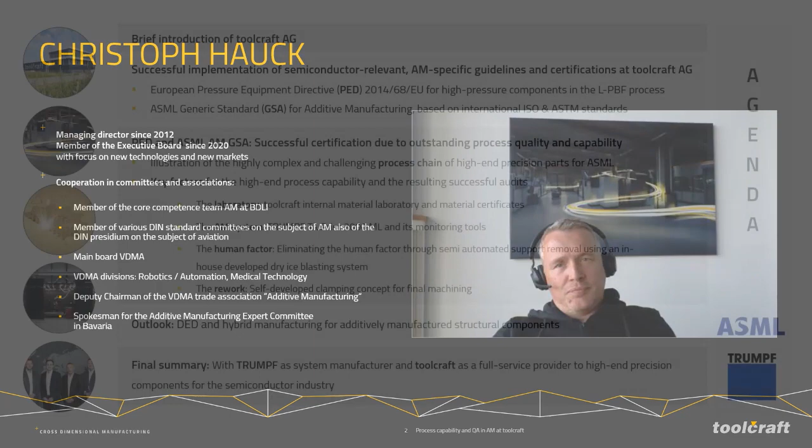This is the agenda for today.

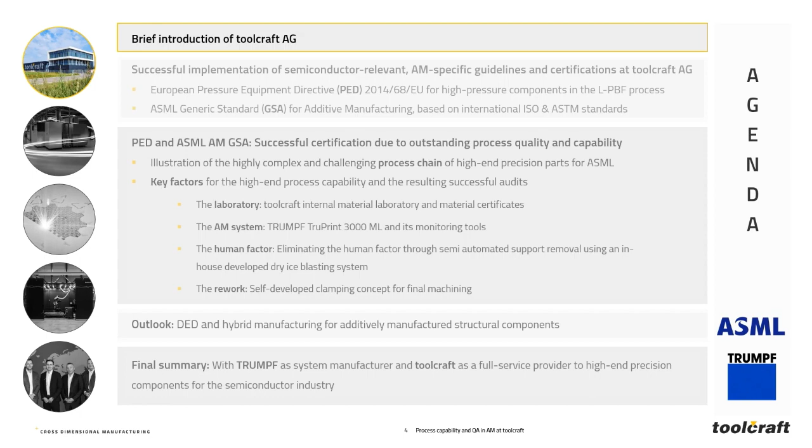First of all, a brief introduction of Toolcraft AG. Toolcraft AG is located in the middle of Bavaria, in a region called Central Franconia. At the moment we have around 463 employees, including 59 trainees. We have 3 board members, 2 facilities, and our molding shop is 12 kilometers away. We have 8 certificates, and our year of foundation was 1989. We are in continuous growth, averaging around 14% per year over the past years.

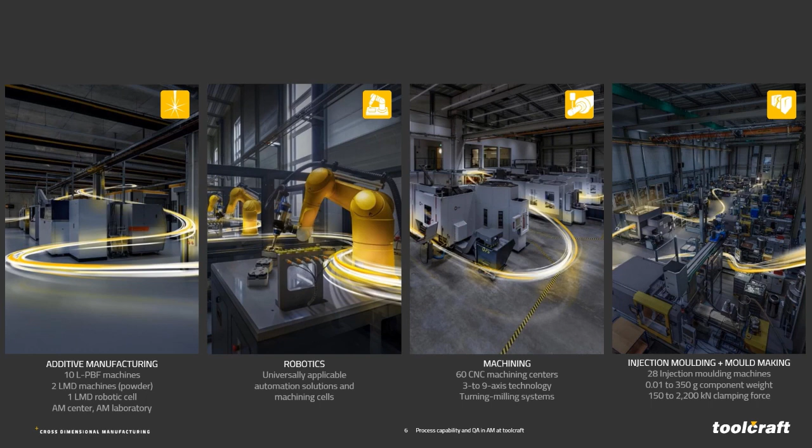The technologies that we provide are additive manufacturing - laser powder bed fusion and laser metal deposition - robotics, high precision CNC machining, and injection molding and mold making.

We have certifications in the aerospace sector, called EN 9100, and the medical sector with ISO 13485. Toolcraft is approved according to the Nadcap Association in welding, which covers additive manufacturing since 2017, but also in non-destructive testing. Finally, we have a DVS certification for additive manufacturing in the defense sector, and also the European pressure regulation.

And now a video about our additive manufacturing journey.

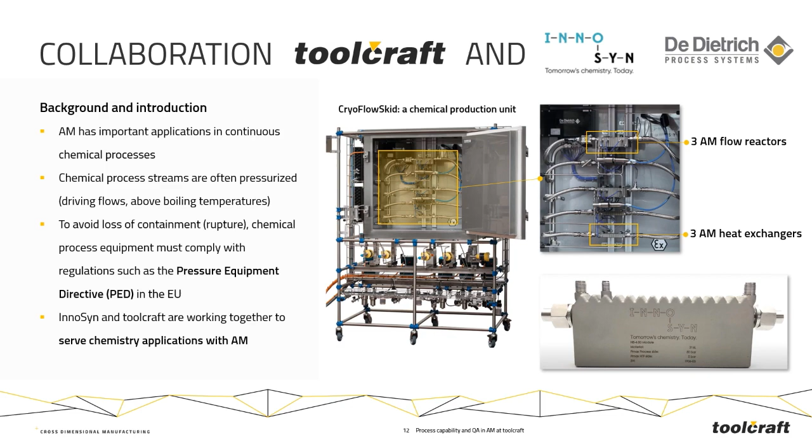The PED provides mandatory guidance for the design, the manufacturing process, and the conformity assessment of pressure equipment with a maximum allowable pressure above 0.5 bar up to several hundred bars. All the equipment has to pass rigorous tests, and only if the products are considered compliant can they obtain approval according to PED certification. Finally, every certified component receives a CE mark.

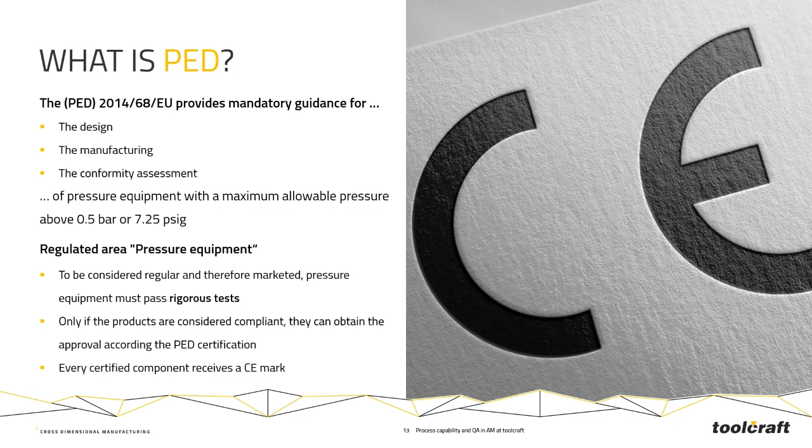Our PED audit was in 2022, in cooperation with TÜV Rheinland, covering comprehensive requirements for the quality management system, the design, the AM process capability, laboratory tests, material properties, personnel, and quality assurance.

Challenges: it's a relatively new area of application, so we needed to define an adequate scope of testing and build up some statistics. Finally, we created a material specification for Hastelloy C22 made with additive manufacturing technologies, and a Certificate of Conformity (COC) that confirms all accompanying samples meet the values of the material spec. A COC must be issued for each component in accordance with the PED.

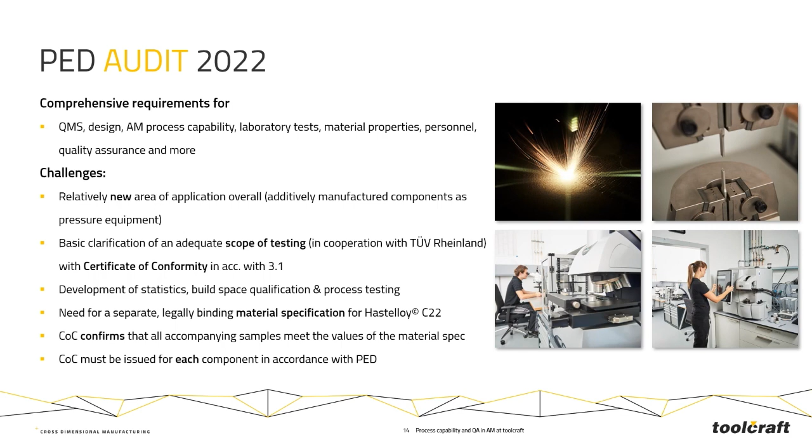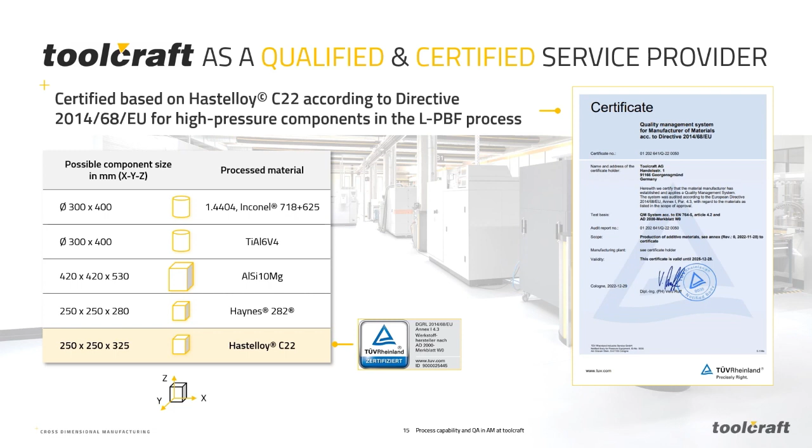As I mentioned, the material behind the certification is Hastelloy C22, a nickel-based alloy. We use it on one of our 10 LPBF machines. And finally, on the right side, you can see the actual certification.

Now, some information about the ASML generic standard for additive manufacturing, called GSA.

International and robust ISO and ASTM standards are the framework for the ASML GSA, and Toolcraft is also working with the German DIN and the European CEN on those robust standards.

ASML has 3 complexity levels in their parts, and since December 2023, Toolcraft is the first company worldwide that fulfills all these requirements.

The next chapter is the PED and ASML AM GSA successful certification due to outstanding process quality and capability.

On the following slides, I want to give you an insight into our high-end components additively manufactured by Toolcraft for ASML with one of our Trumpf systems and together with our partners Dockweiler and LRP secure systems.

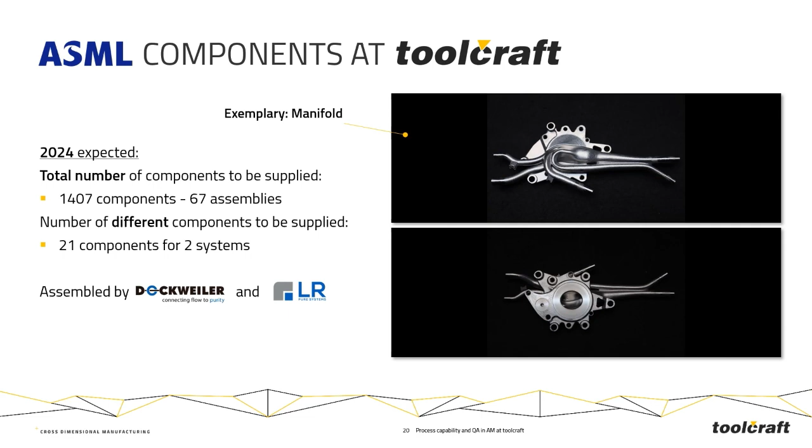This is an example of a manifold of a complex system that we supply to our partners, so in total 21 different components for 2 systems. With the expected ramp up this year for 67 assemblies, that's 1,407 components in total.

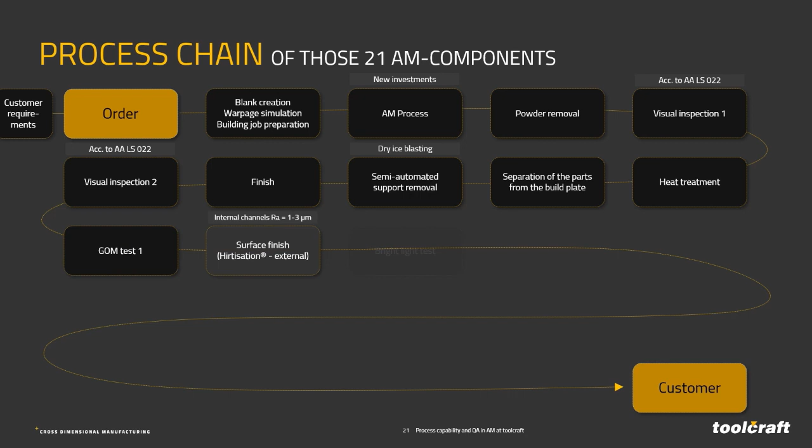From the order until the shipment to the customer, we have 23 different process steps in terms of production, but also quality assurance. So it's not just the printing of the part and then the shipment the next day. It's much more.

What are the key factors for the high-end process capability and the resulting successful audits? First of all, the customer requirements.

Possible customer requirements can be certification of the service provider, compliance with AM norms and standards, of course technical drawing and a 3D model, but also AM-specific customer specification.

In our opinion, high-performance additive manufacturing in metal without an in-house laboratory is not possible, because you have to check the powder, you have to check the process, and finally, of course, you have to check your component.

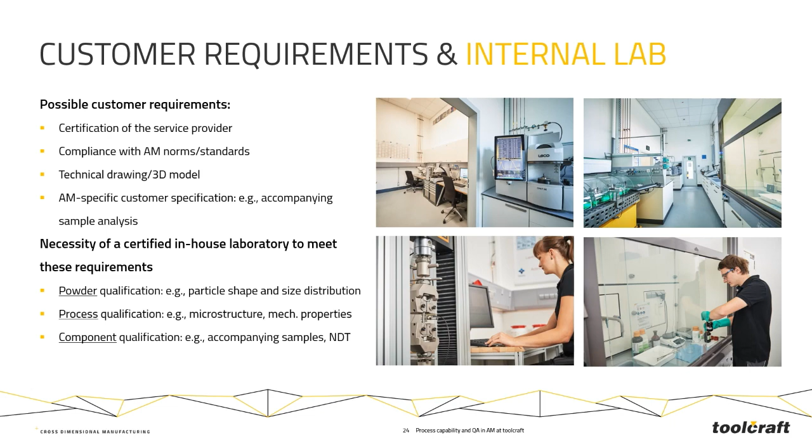Now about the AM process and our new investments.

To get or to reach the next level of industrial additive manufacturing, we had to invest in a brand new system provided by Trumpf. It's the TruPrint 3000 multi-laser. We installed the system in January 2024.

The processed material is the stainless steel 1.4404, which is also well known as 316L. We have 2 700-watt laser units installed.

What we like is the further development in the shielding gas concept, the primary and secondary gas flow, but also the extensive industrial monitoring for quality assurance. We need to have this, and it has to be robust, to reduce or finally avoid CT scan costs.

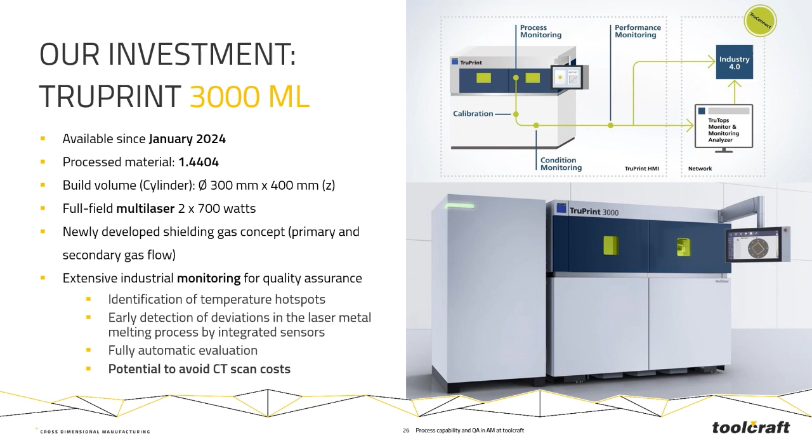The next step is our semi-automated support removal. This is our engineering solution of the support structure removal. It's done with frozen CO2, so dry ice.

At the moment, we are able to remove the support structure from aluminum, titanium, and stainless steel. Inconel is in final development, and we have some materials already in mind we want to progress on.

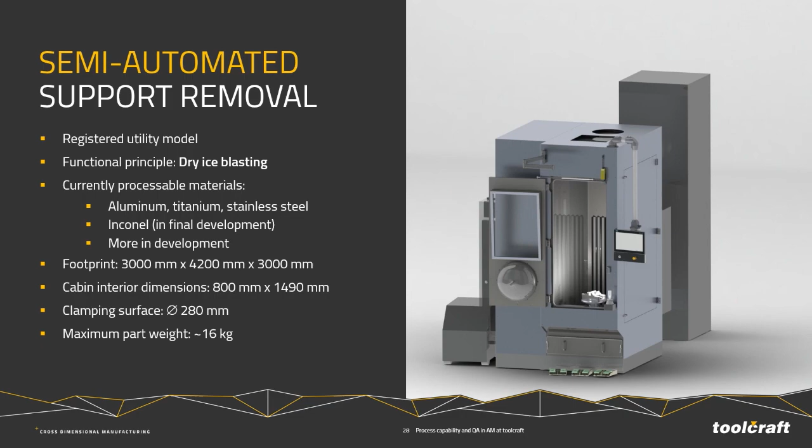A little bit of insight into the registration of the utility models. So you see a specific nozzle geometry, but also specific surface structure inside the nozzle, and also an automation level.

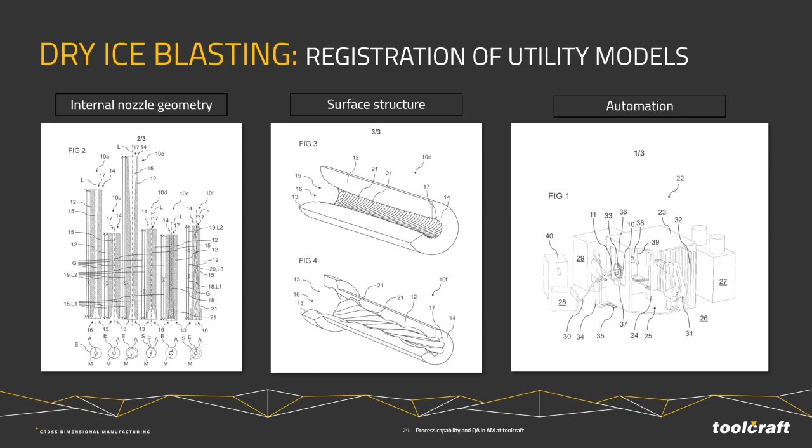Again, a short video in the middle showing how the support structure removal is done with the frozen CO2.

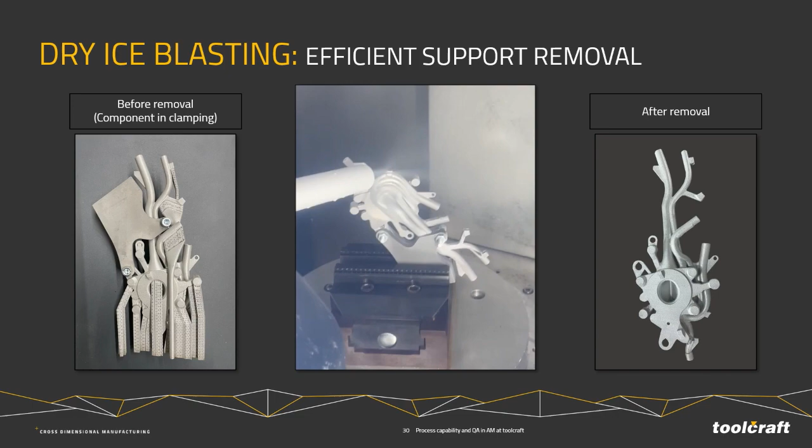Okay, the next process step is the machining. And also for these really crazy additively manufactured designs, you need to have specific clamping devices.

And this is the clamping concept for the part we already have seen. So it's based on our knowledge and innovation.

We use Siemens NX in terms of the CAD system. Meanwhile, we have the parts standardized in a catalog and included in an NX library, so we are quite fast with these standardized parts to create different kinds of clamping concepts or clamping situations.

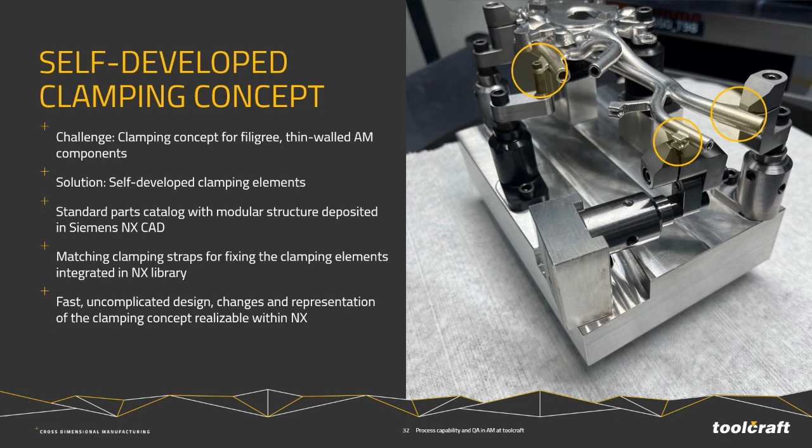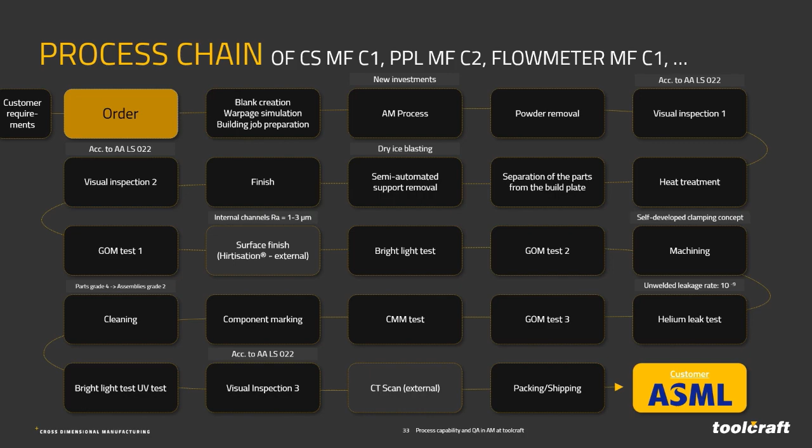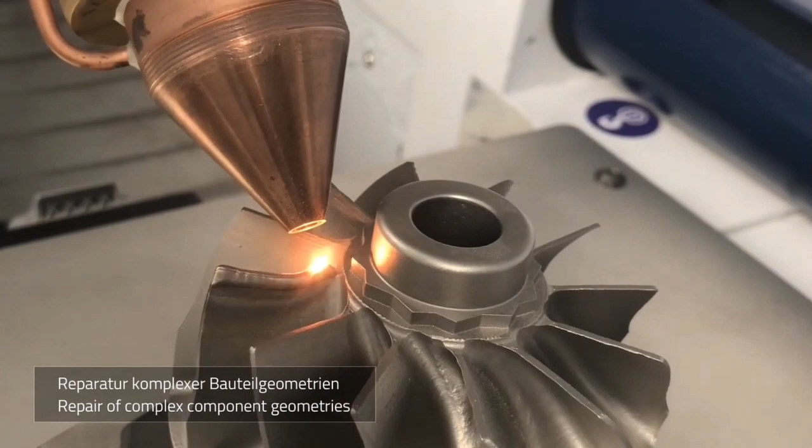Toolcraft is a competence partner in LMD technologies to one of the biggest consumer good producers in the world. Here's an example of a repair application in terms of mass production machinery.

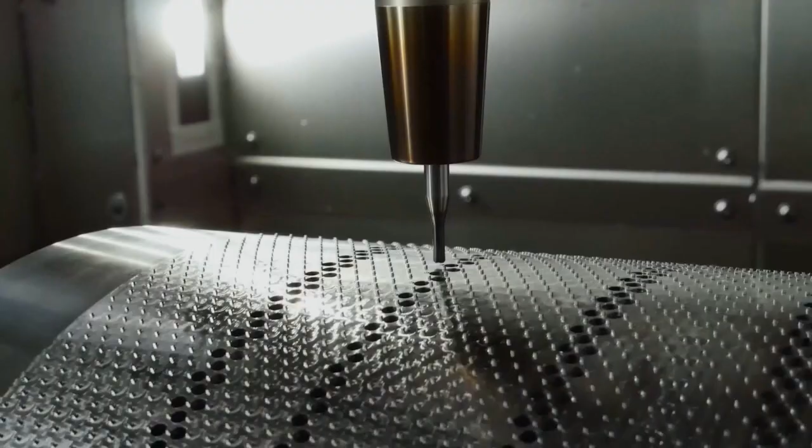A security project, LPBF and LMD. For complex housing, it was necessary to produce 4 single parts in the powder bed, and then we joined those parts together with LMD technology.

The standard nozzle was not sufficient enough to reach all the areas of the part, but no problem, as we are also able to produce pure copper and copper alloys. A slim nozzle was produced by Toolcraft.

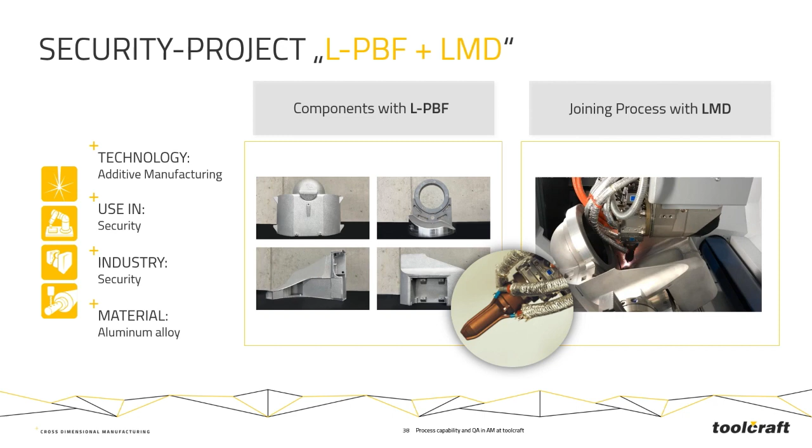And finally, the system is installed at the Puma tank from Rheinmetall, which is our end customer. This is just to give you an impression. It was necessary to do it with additive manufacturing for the functional cable feeds, for the high long-term availability of spare parts, and the high speed in the development of the carrier element.

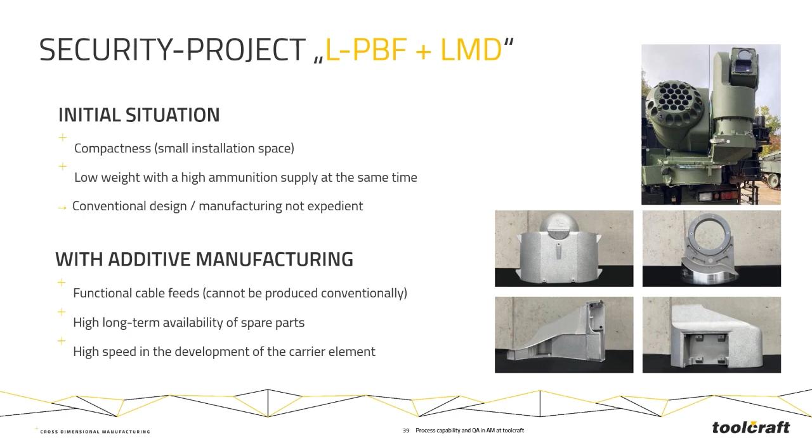Let's have a look at the joining process, which now takes around 2 hours for this multi-layer joining process. In the past, it was a manual process, more than 10 hours.

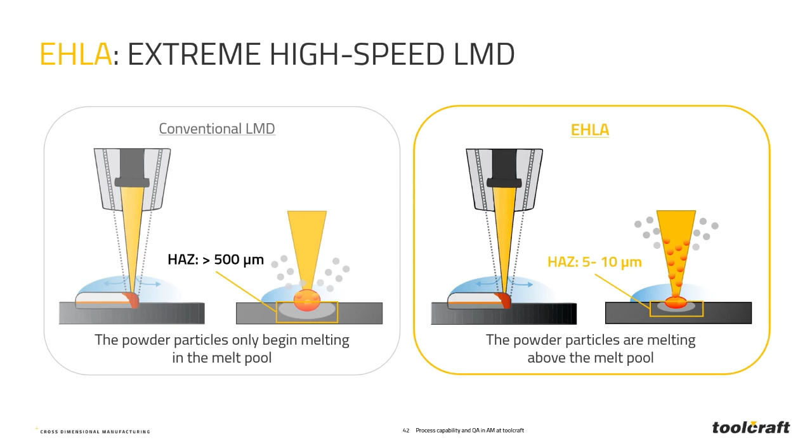And then we end in the extreme high-speed LMD here at Toolcraft. On the left side, the conventional LMD process with a heat affected zone of around 500 micrometers, compared on the right side, the extreme high-speed LMD with a heat affected zone much lower, 5 to 10 microns, because powder particles are melted above the melt pool. A real-time comparison of the process speeds, left side LMD and the right side the EHLA process for high-speed LMD.

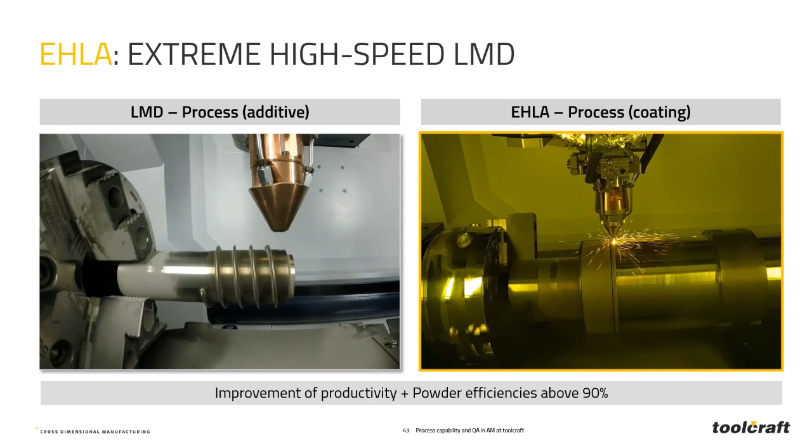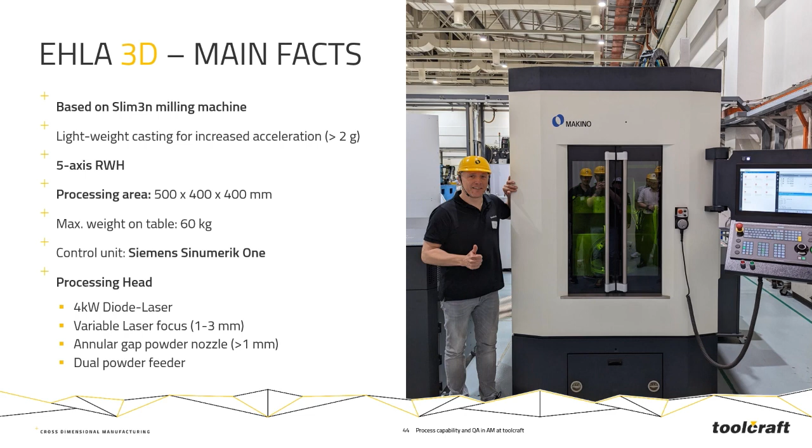Last but not least, our self-developed robot cell for hybrid additive manufacturing. This project is the marriage of our additive manufacturing division together with our robotic engineering team. The robot we installed is from our partner Mabi Robotic AG in Switzerland, and it consists of an adaptive spindle module. The spindle fixture is an HSK 63. The spindle speed is 16,000 rounds per minute, and at the moment the number of tools is 7.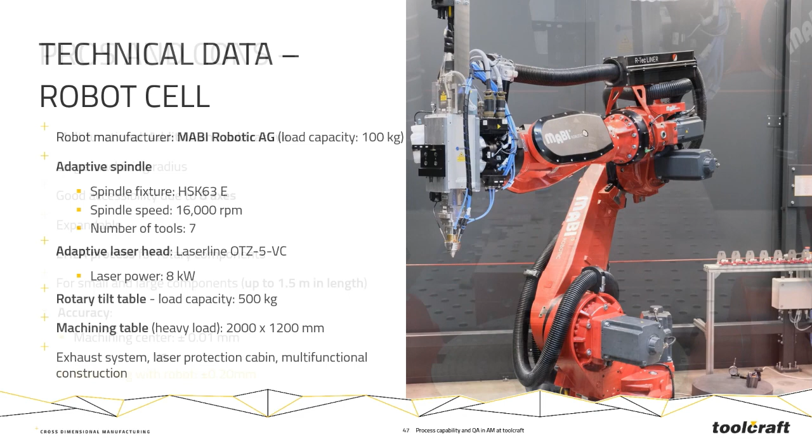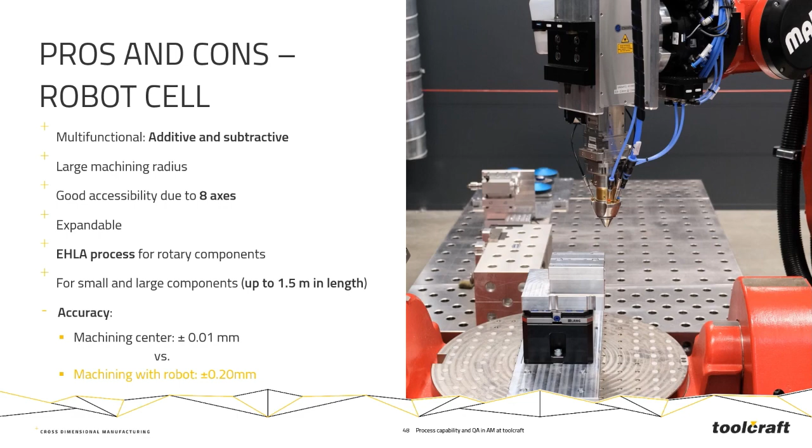Also a short video of the capability of the system.

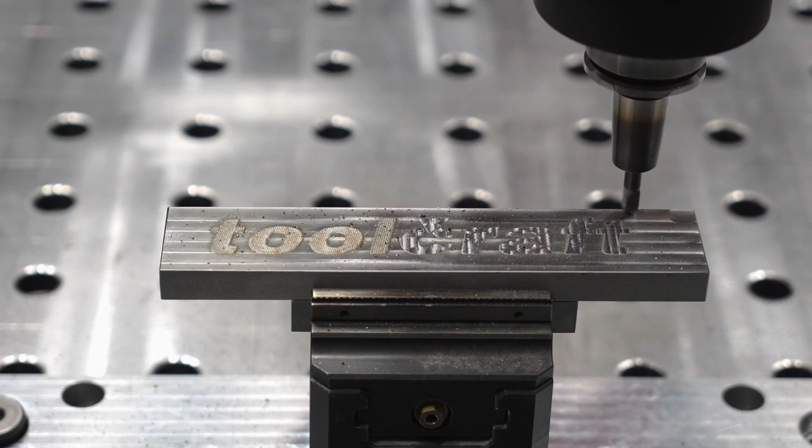What's next here at Toolcraft? Hopefully higher deposition rates through wire application. Here's an outlook.

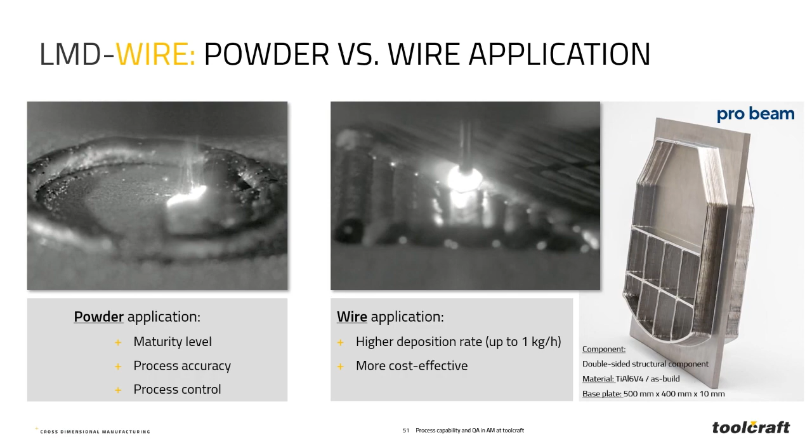ProBeam offers a nice solution based on electron beam technology. And here we can see a nice example on titanium grade 5, how to reduce chips and think differently in the production of structure parts or frames.

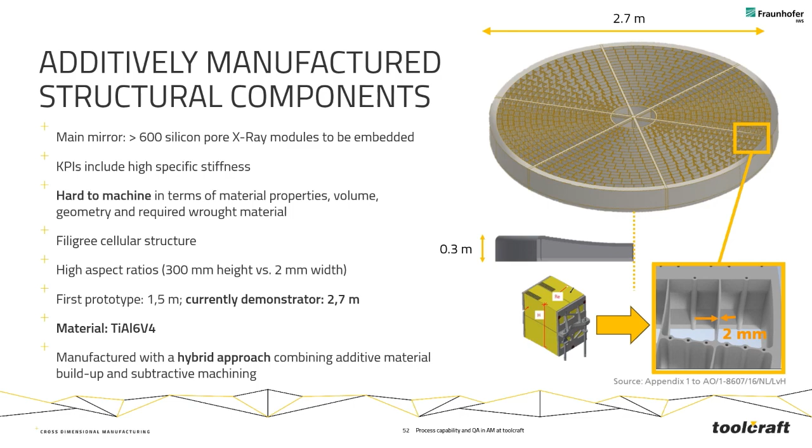Fraunhofer is a long-term R&D partner of Toolcraft, and here's an example from Fraunhofer IWS located in Dresden, showing how to produce bigger parts up to 2.7 meters in titanium grade 5 with powder. It's a multi-robot system with 2 laser nozzles that take care of the production of those thin wall thicknesses with titanium powder.

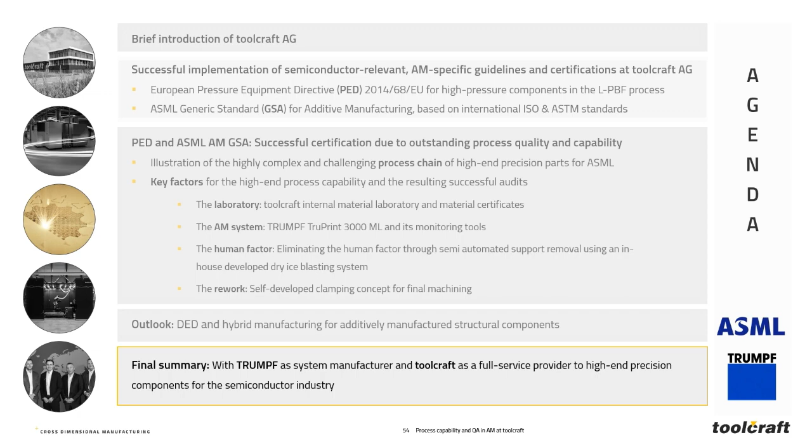And then the final summary. AM with Toolcraft, Trumpf, and ASML. First, more and more AM-adapted standards and certifications are emerging with a focus on process capability. Second, process capability can be achieved with the right system tools, the right equipment, and of course the right and highly motivated team. And through those close partnerships and regular feedback loops, such solutions are possible.

And of course, the main driver also here at Toolcraft is innovation. But we will not stop being innovative. We already think about further investments in our machine park, the wire optics in our robot cell, but also high temperature plastics such as PEEK, PEI, Ultem, made with additive manufacturing technologies.